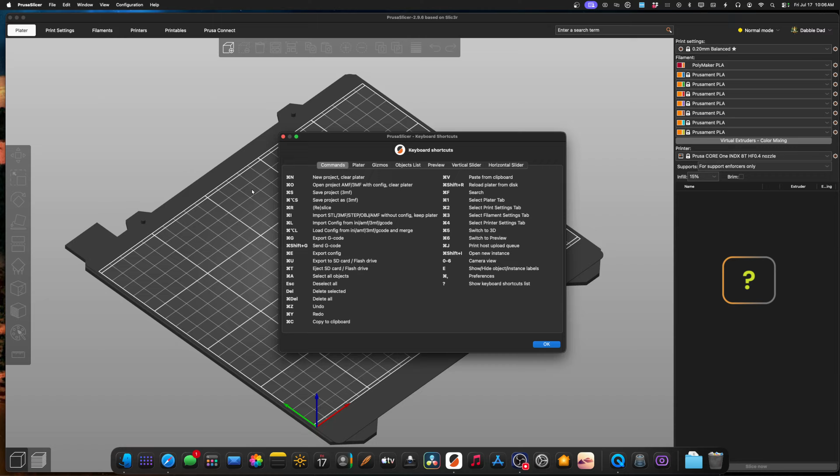So why is this good information to know? Let me make it a little bigger here. The shortcuts help you do things faster. You can do all those things on the screen, but there's a faster way to do everything. And seconds turn into minutes, minutes turn into hours.

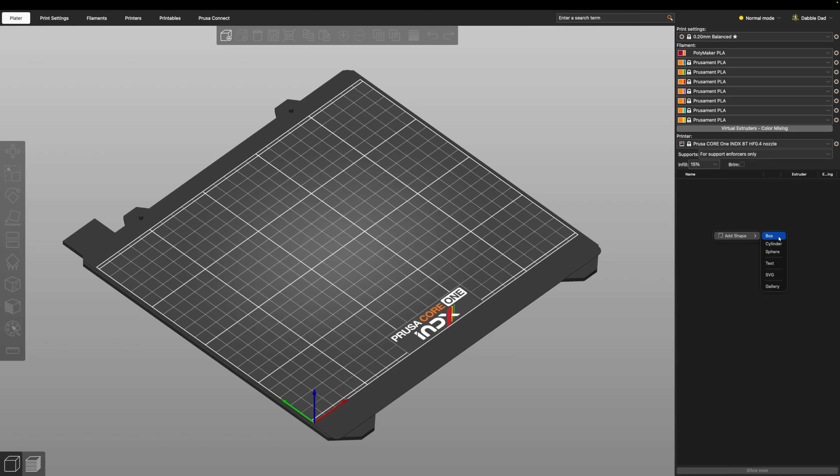So do you want to save yourself one or two seconds? Slice smarter, not harder. Say we get back over here, we add an object, you add a shape, you add a box. We've got a block on there. Now you need to go over here and change the scale of that item. So you click on scale and change it to whatever you want, move it around, shrink it up. Okay, so there you've got your basic shape.

Now what happens when you want to add a secondary shape that's the exact same thing? Are you going to go through all those steps, or are you just going to come up here and hit Add Instance, and now boom, you have it. But how long did it take you to take your mouse, go up here, scroll through, find out, oh, there's Add Instance, okay, and then click on it? Or on your keyboard, you just hit plus.

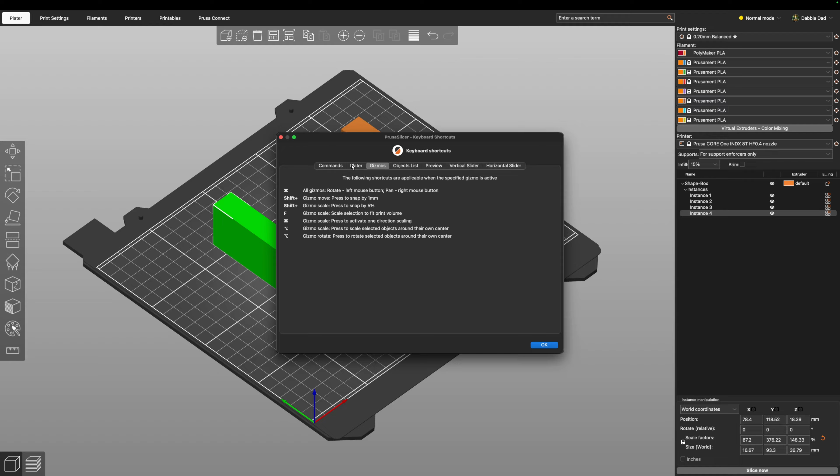To me, keyboard shortcuts are great, that's if you know them and you know what they do. Obviously, Add Instance, yay, you know what that is. But if you don't already know what that does, let's find out where it's at on the screen. There it is: Add instance of a selected object. That's a very bland way of saying it, but they try to do the most with the space they have available, so everything is kind of uniform for everybody to understand.

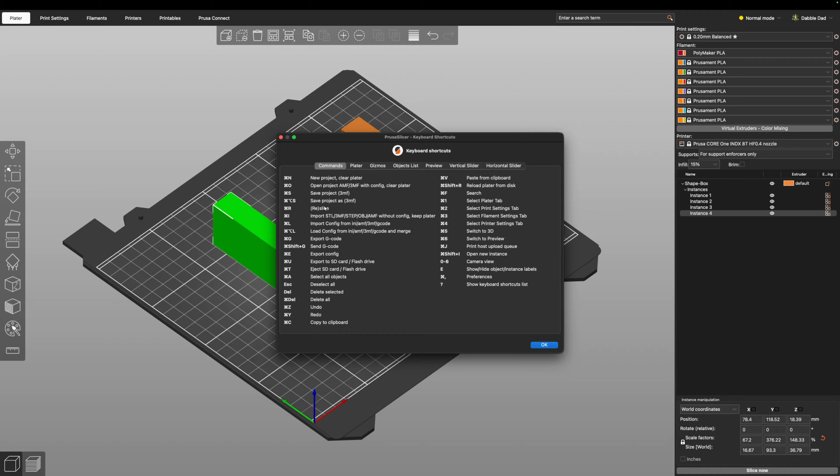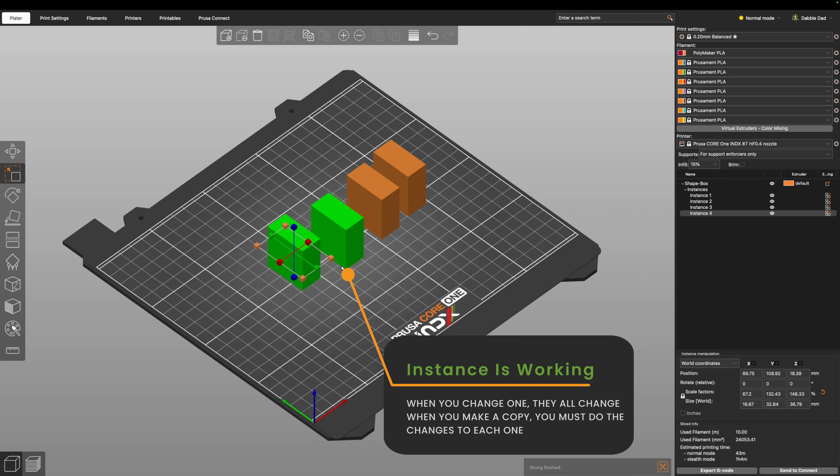But you have to sort through what these are. Say you want to go to Command, Reslice, there we go. On the very bottom right hand corner, if you hit Slice Now, you can slice your individual objects. Then you move one of these around, shrink it up, and obviously you're going to have to reslice that item. Come over here and hit Slice Now. That's exactly what reslicing is, it's slicing the models you have on the plater.

But you have to move your mouse all the way down. Say you've got a whole bunch of stuff in the way, where's the button, how do you know where the button is? Or you hit Cmd+R and it does the exact same function. That's a very basic way of thinking about what I'm trying to get across here. Not a lot of people understand what Move Active Thumb Left, Set Left Thumb as Active, or Set Right Thumb as Active mean when you move your up and down arrow.

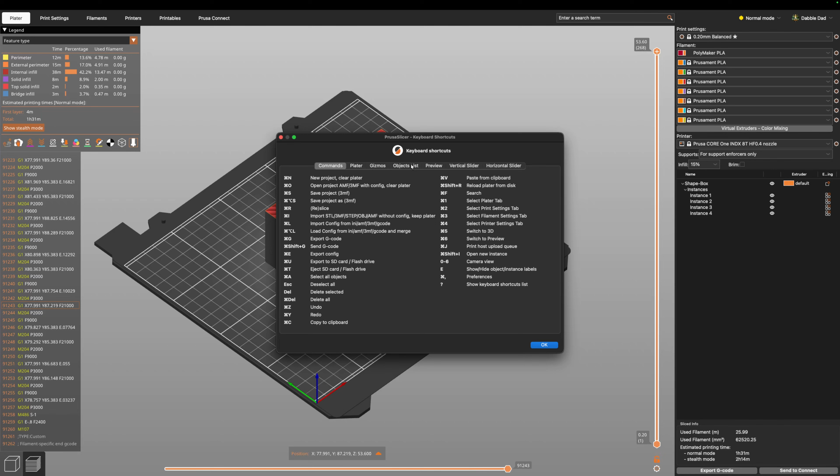Well, you can come up to the objects list because it deals with the objects list. Come up to the objects list, and now you can see all the shortcuts that pertain to just this specific task. Now, are there more shortcuts you could be utilizing? Obviously those are under the commands section, because those are utilized under the whole program.

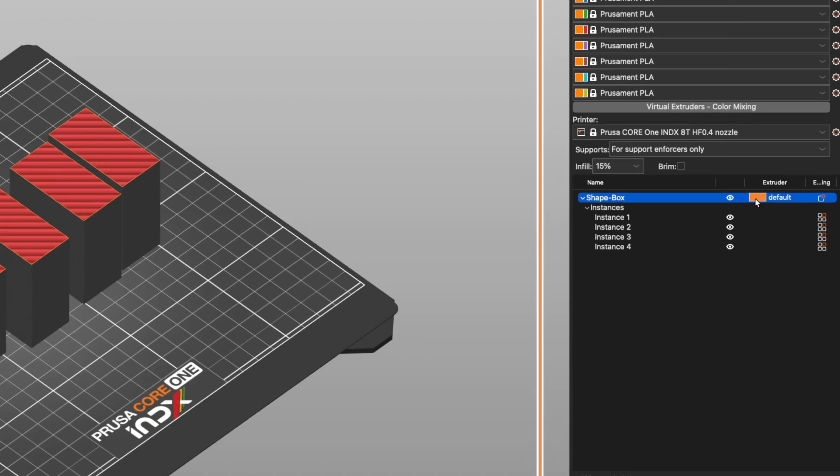So under here, I want to change this to filament number 6. Instead of clicking on it, right-clicking, clicking the arrow, and scrolling down, all you need to do is click on the item and hit your numpad for whatever number you want. So say you want to change it back to number 2, you hit number 2, as opposed to right-clicking, clicking the down arrow, and scrolling down to find it.

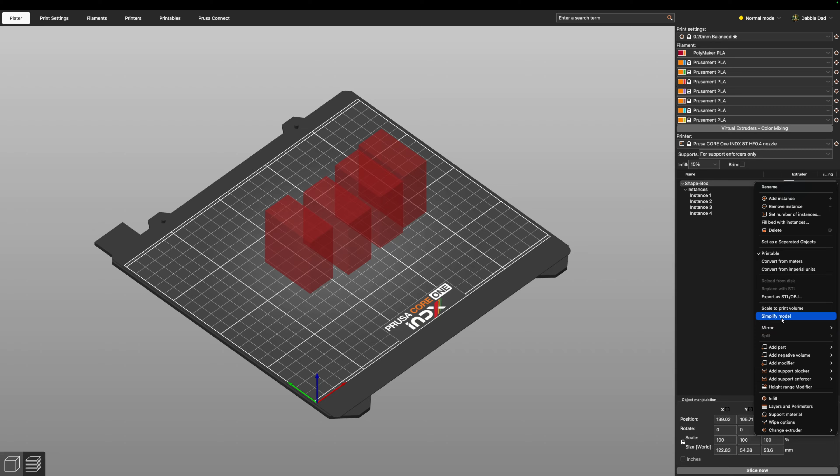Because once you have a whole bunch of these and you're having to change different objects and different filaments. For instance, we split up this object. Let's just add another object. Boom, we got a box. That box within a box down here, bring it over here. So say you've got a whole bunch of them, but you need one for filament number 1, one for filament number 2, one for 3, 4, 5, 6, 7, 8. You kind of get the gist.

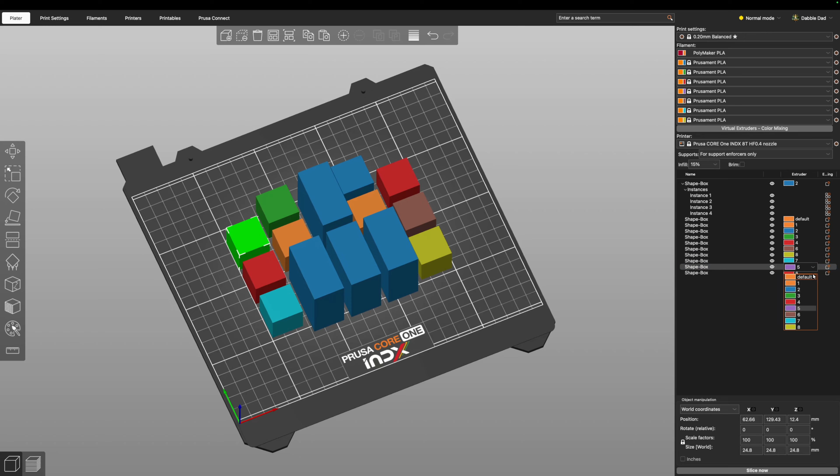All right, that was very, very quick. But what happens whenever you have to right click on each individual item? That's what I'm talking about. That's the time that's just compounded. But how do you know to do that?

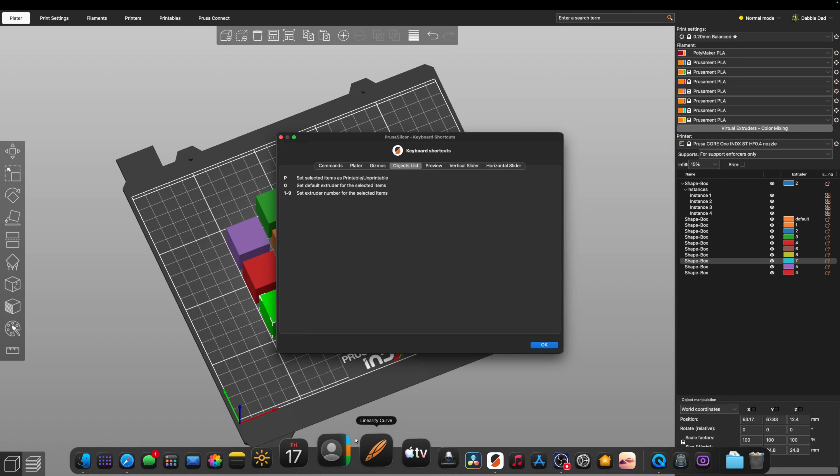Let's go back to your keyboard shortcuts. You bring up your keyboard shortcuts and you're like, I know it's an object list specific task. Go here: 1 through 9, set extruder number for the selected items. There is your shortcut. But if you didn't already know what this was, you can come over to the website and learn more about it, because you can't click on this to learn more.

So we're going to go to objects list, and you click on that and it says, pressing a number picks the extruder that prints the selected model, which is useful for multicolor prints or multi-material prints. Obviously I am going to be adding on that, and it's going to have maybe a video linking to that specific shortcut, maybe a picture or two. I think some of these I have pictures already.

Let's go ahead and click on, let's see, let's try showing you Reslice. Okay, right there, Reslice. What is it? What does it do? It runs the slicer, which turns your 3D models into layer by layer instructions for your printer. If you already sliced it once, this reslices it and includes any changes you made. And it also has a little picture showing where that shortcut function is completed on your UI.

Same thing with import configuration, Cmd+L. That's very basic, what does that do? Well, it loads your print settings from a file such as INI, AMF, 3MF, or G-code files, and applies them, replacing the settings you currently have. So you can actually import configuration settings based upon what somebody else has already made. Where does that shortcut lead to on your navigation or UI inside PrusaSlicer? Well, whenever you click on Cmd+L, it leads to this little spot right here.

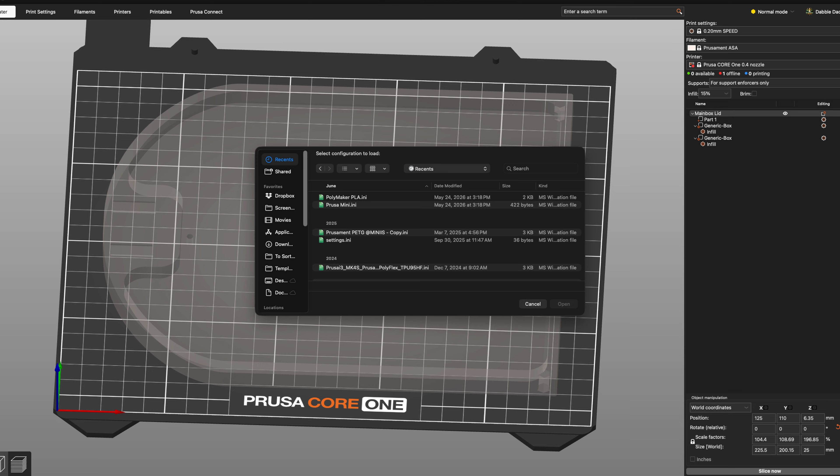So if you're constantly hitting this button over and over and over again, and you're like, Cmd+L, okay, well I've been doing that task, but what exactly has it been doing? Well, that tells you that it loads the print settings. So it gives you a little bit more about the shortcut that's being provided.

No, that's it for me today. I woke up and I had an epiphany, and I just needed to get it out of my head onto the screen. I needed to show what I've been working on. This is exactly what I've been working on.